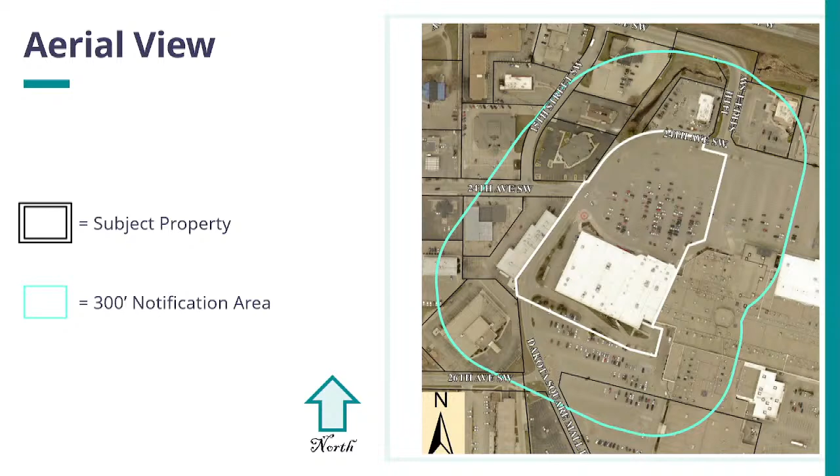Thank you, Chairman Dominguez, members of the commission. Target is part of the overall Dakota Square Mall site. The white lines on this map indicate the property boundaries, and the light blue lines denote the property owner notification area.

This case is very similar to Scheels, which was processed earlier this year. A major modification related to on-site circulation and overall building expansion is prompting the need to bring the property into compliance with the newly adopted land development ordinance. The equivalent zone for C4 planned commercial, which this site is presently zoned, is C2 general commercial with a PUD overlay.

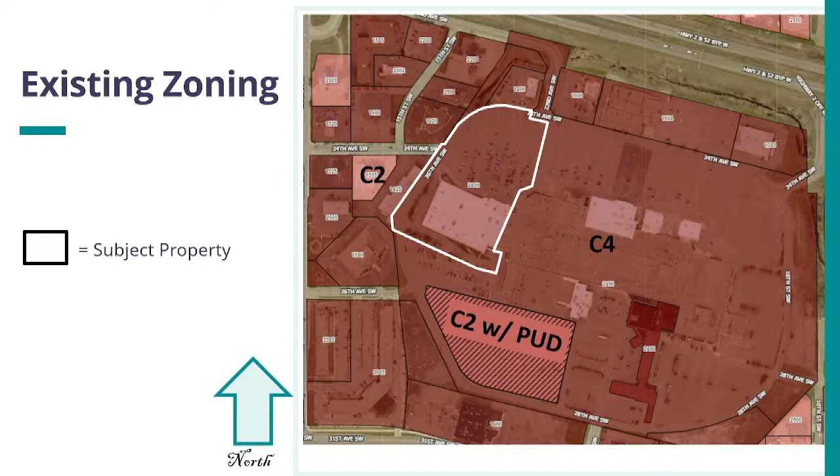The future land use map denotes the subject property as commercial. So we'll go over some of the modifications. The modifications to the site include a 24,434 square foot building expansion along the front entry and west facade. This expansion is realigning the broader circulation patterns for the property, so I'll bounce back and forth between some of these slides so you can see some of the deviations between the on-site circulation and parking.

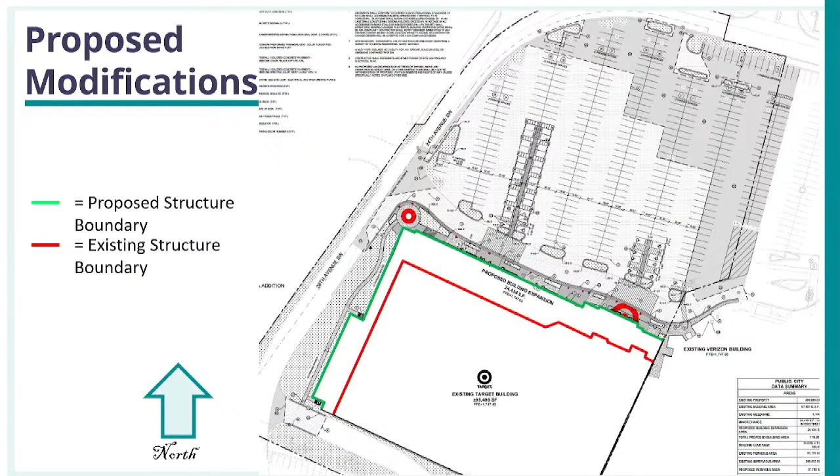So these are the proposed modifications. Again, I'll go back and forth. If you notice, the parking to the west is being removed to accommodate the expansion and expand some landscaping. Again, the on-site circulation is going to be straightened out a bit. The overall design, at least from an aerial perspective, is going to look very similar.

Landscaping improvements along the north facade of the building will include planter boxes and foundation plantings, parking lot end caps, and expansion of the landscape area along the west, as previously noted. This will increase the pervious coverage of the site from approximately 8.19% that exists today to 9.92%. Through this project, this equates to approximately 6,600 square feet of additional pervious coverage that's going to be added through this expansion.

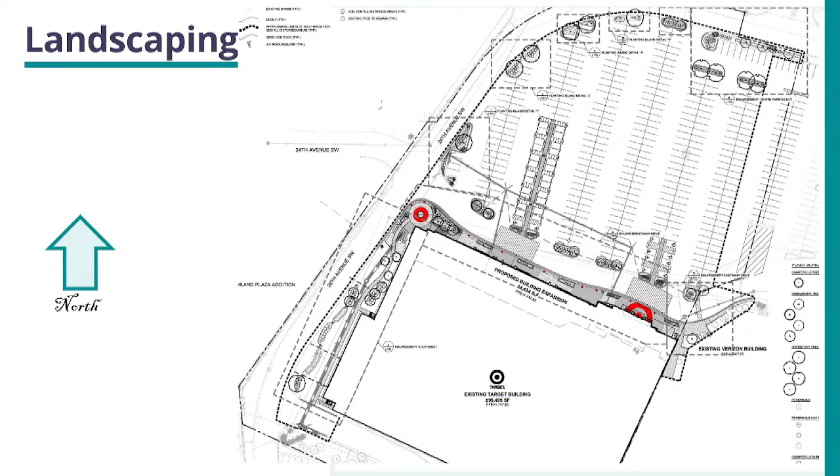Another major change operationally for Target is to expand their online order and pickup accommodations on site. So the parking is proposed to be reduced overall to accommodate the expansion, but overall, Target's analysis of the site is ultimately that while they're losing parking stalls, the incorporation of these drive-up online order and pickup stalls will offset any of those losses.

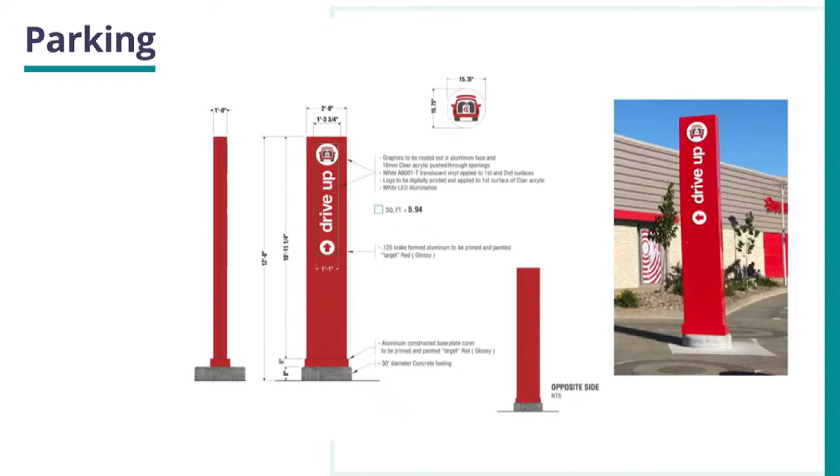Target did submit a late exhibit with minor adjustments, so compared to what's provided in the staff report, I'm going to highlight each of the changes. I'm going to hand these out to you so you have them. Just give me a minute to pass these out. Thank you.

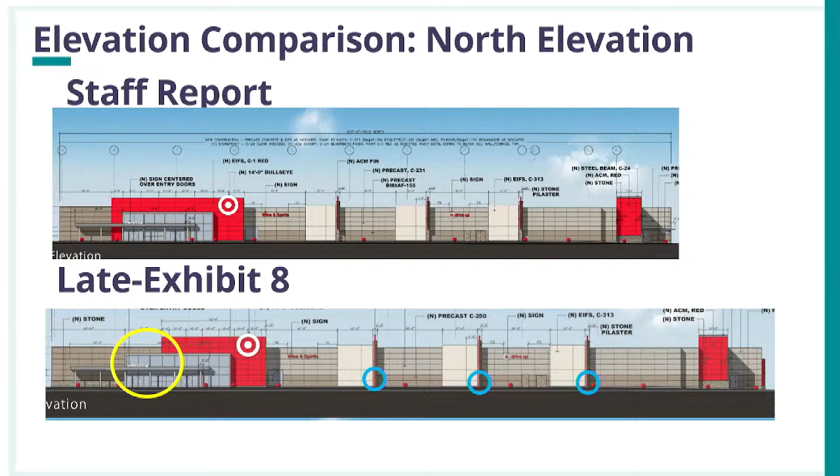So when I say minor changes, I do mean minor. As you can see, what was included in the staff report on top versus what's provided in the late exhibit - there's just some different entryway alterations. We've highlighted those in the yellow circles and the blue circles to bring attention to the changes. They're very minor, but as I go through these, I want to make sure you have the most up-to-date information, so that any motion for approval would include this version of what's proposed by Target.

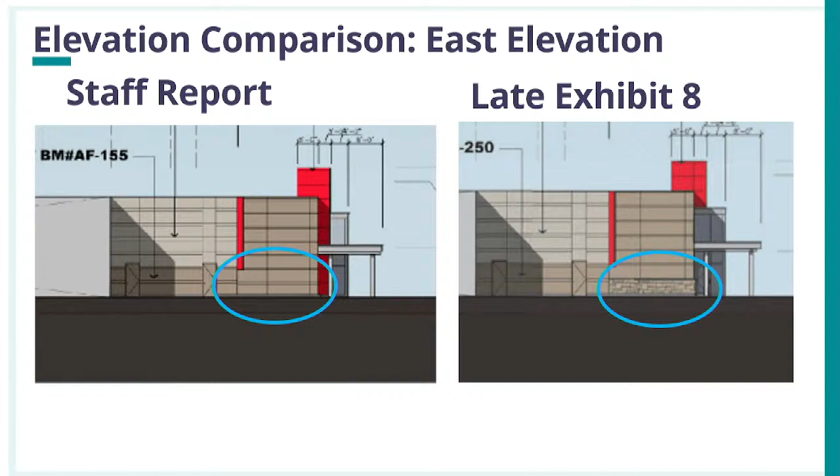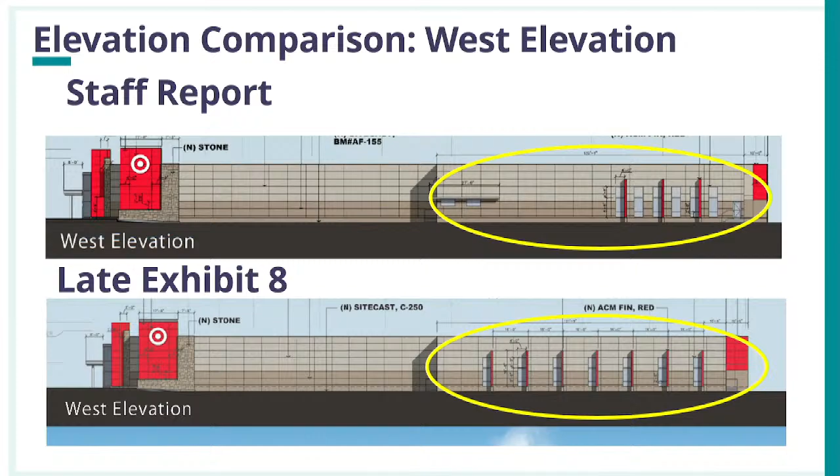So here are the findings of fact. In short, the applicant has submitted a complete application. The proposal meets the requirements of the PUD overlay. The Minot Planning Commission has the authority to hear the case and provide recommendations to the council. As I previously mentioned, we're recommending approval of the application.

The recommendation on screen includes reference to late Exhibit 8. Staff asks that any recommendation aligning with ours should use the one on screen versus the one included in staff's written report. With that, staff will stand for questions.

Thank you, Mr. Van Dyke. Is there any questions for staff? Seeing and hearing none, then we will move to the public hearing.

If there is anybody here who wishes to speak on agenda item number 8, please come forward, give us your name, sign in, and the floor is yours. Hi, I'm Ryan Hilstead. I'm here on behalf of Target Corporation.

I work for Kimley Horn. I'm the project consultant, and I'm available for any questions. Is there any questions from the commission for the applicant? Seeing and hearing none, then, I think we'll let you know if we need you, Ryan.

Sounds good. Is there anybody else present that wishes to speak on agenda item number 8? Very good. Well, seeing none, we will close the public hearing then. Turn it over to the commission for a motion.

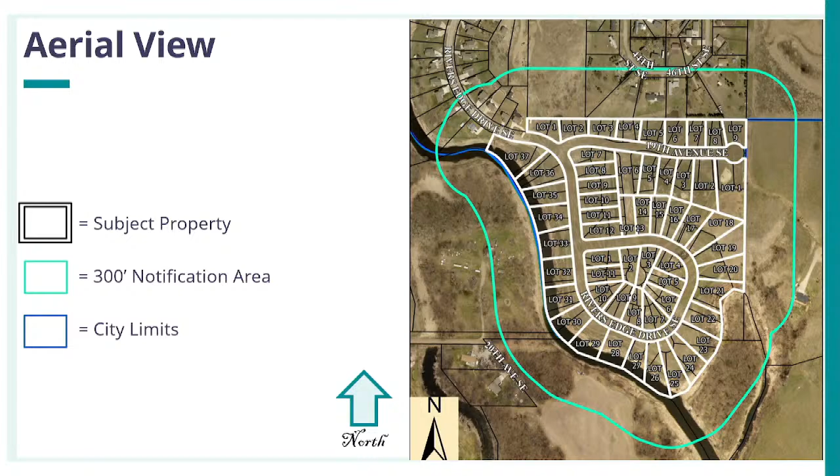Looking at the aerial view of the property, we can see the 300-foot notification area and city limits. Notably, lots 6 and 13 from block 2, the ones in the middle, and it goes through the middle around the outside where 45th Street Southeast was platted. As part of this, it will be going away because it's currently a platted road — it's just right of way right now.

And that goes right into the preliminary plat. Aside from the removal of 45th Street Southeast, there are proposed 57 lots that are part of the subdivision, versus the original one, which was 116. So overall, it's shrinking by about 59 units. Now, an important thing to note on this is an easement that is on the far end of 19th Avenue Southeast.

So there's an easement there shown as some dotted lines on the map, which will indicate when the development to the east develops. That cul-de-sac will be turning into just a through road, ideally, allowing it to expand out that way. So it won't be a dead end in the future. It's allowing that to actually be designed for.

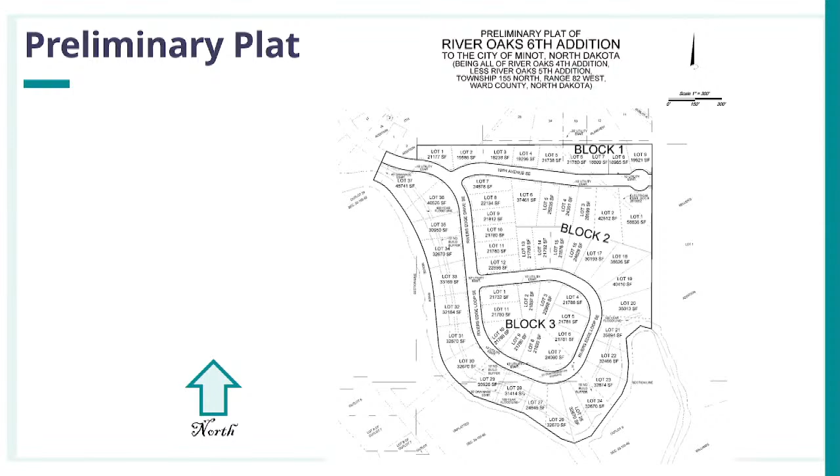Overall, the subdivision does meet all of the required standards for a subdivision, except for section 10.3-3C related to dead-end roads and how long they can be, related to the beginning of a cul-de-sac.

Going into the existing zoning of the property, the vast majority is zoned R1 single-family residential. It's going to be staying as that, with the exception of the area in the middle, which is R2 two-family residential, and that's actually shrinking quite a bit in size for actual properties, going from 38 to 11 lots. But beyond that, the zoning for the properties really won't be changing.

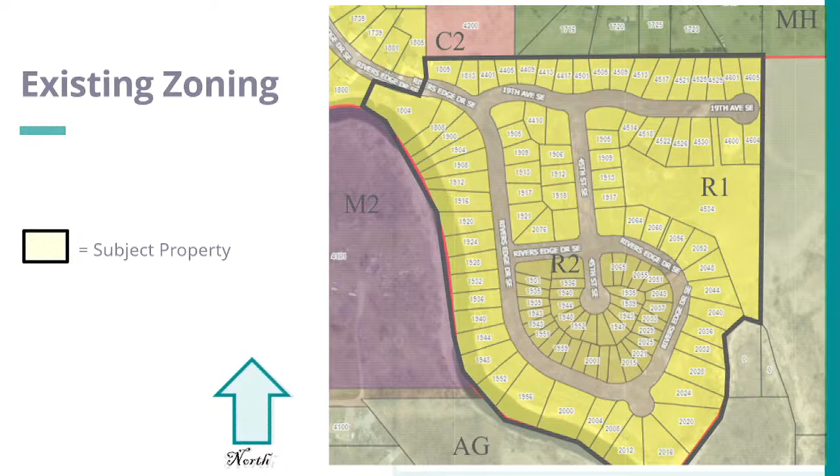Now, moving to the variance itself, staff finds there are grounds to support a variance based on the topography of the site, because there are significant topographic changes within 500 feet of the cul-de-sac, which I'll show on screen, that would greatly limit the feasibility of providing additional connection to bring the development into strict compliance.

Now, looking at the topography, I took two of the exhibits, Exhibit 1, the aerial photo, and Exhibit 7, the topography, and overlaid them. So you see how significant the topography is, especially within 500 feet, which I denoted on the slide. Within that, where the road itself is, it's fairly gradual, but going within that 500 feet, it gets fairly steep, and across the distance to River's Edge Drive, it could be 40 to 50 feet in drop from the road up there to where it actually comes out.

So looking at that, I will go and wind it back to the previous slide looking at the topography. We kind of touched on this already, the overall density of the development is going to be decreasing dramatically from where it was.

Where it was 116 different lots, it's now going to be 57. As far as the existing distances, the 500 line is the green line, going out to where the current platted 45th Street Southeast is. That's about 615 feet, and they're proposing going to roughly 1,000 feet from the cul-de-sac, shown on the screen to just above where it says 1560 for the elevation.

So as it stands right now, the development actually would be more of a concern if they were to build exactly as they're allowed to today. They'd have higher density, and it wouldn't have a provision at all to actually have a through street there, because that cul-de-sac would just be ending, and that's as far as that would go.

So just through the very nature of how this is actually being platted, it is addressing a lot of the concerns that Mr. Ritter had. I believe it's Ritter.

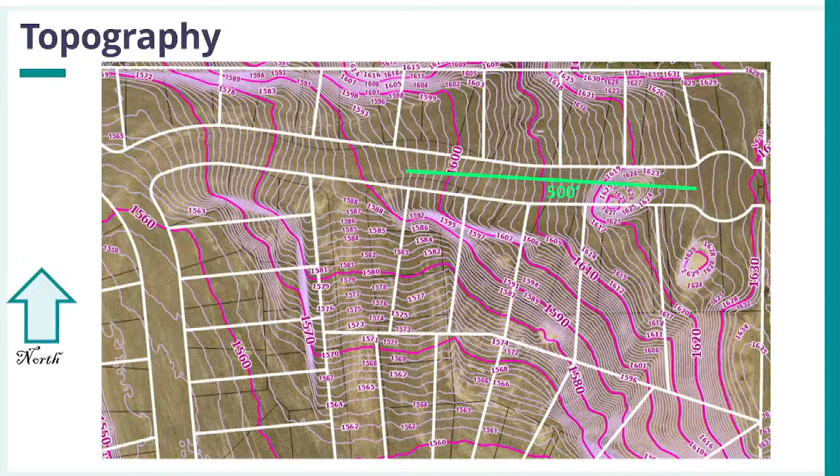Thank you, I appreciate that clarification. Thank you. Any further discussion?

Mr. Chair, I too share those concerns as far as the density of traffic. I've driven out there, those roads are not good and they're narrow. And to add an additional 57 properties, I wonder if there is a way to go ahead and approve it from R1, R2 to R1, but maybe hold off on approval for the 500 to 1,000 feet. Is there a way to do that, to take another look, to have somebody go out and speak with someone?

Well, the motion as it currently stands on the floor is approval of the variance and the subdivision plat, which needs to be acted on. That is the current motion on the floor. Anything further will be dictated after the fact.

Chairman Demakis, if I may, if the variance were to be denied, the existing subdivision plat they proposed wouldn't be in alignment with the subdivision code as it is. So that would probably change staff's recommendation to a denial, as it wouldn't meet code, because then they'd have about 1,000 feet of dead end where they can only have 500. So to approve the rezoning would be to, at the same time, look at approving the subdivision, because that's really rezoning just that block, which doesn't exist without the subdivision. The variance would have to go along in hand with the rezoning and the subdivision all at the same time. I see, thank you.

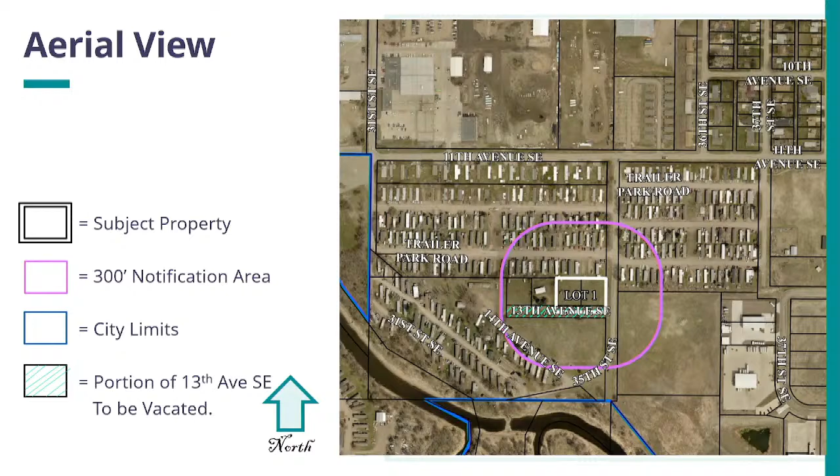Going into the subdivision and the aerial plat, this is southeast of the Public Works building, which you can see on the map in the upper left-hand corner. On the map, I noted the portion of 13th Avenue to be vacated. As part of the subdivision, they will be including half of that vacated 13th Avenue within the proposed Jefferson South Addition.

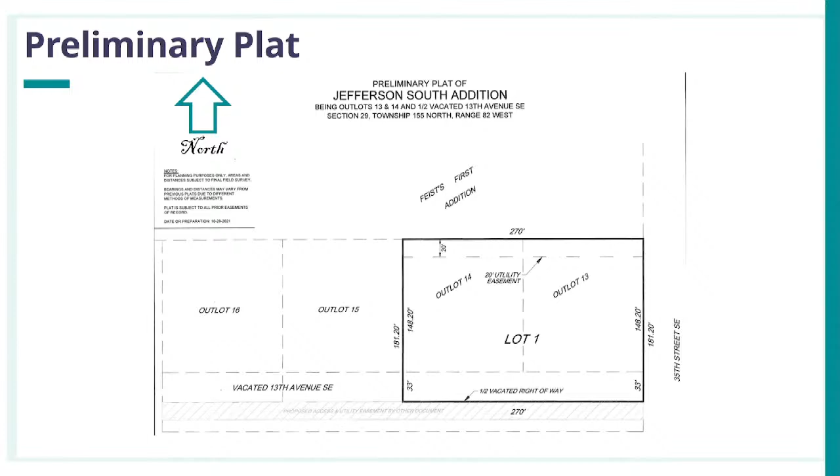Looking at the existing zoning, the property is currently zoned MH, the manufactured home district designation. The property to the south, even though it is a manufactured home park, is currently zoned C2 General Commercial District.

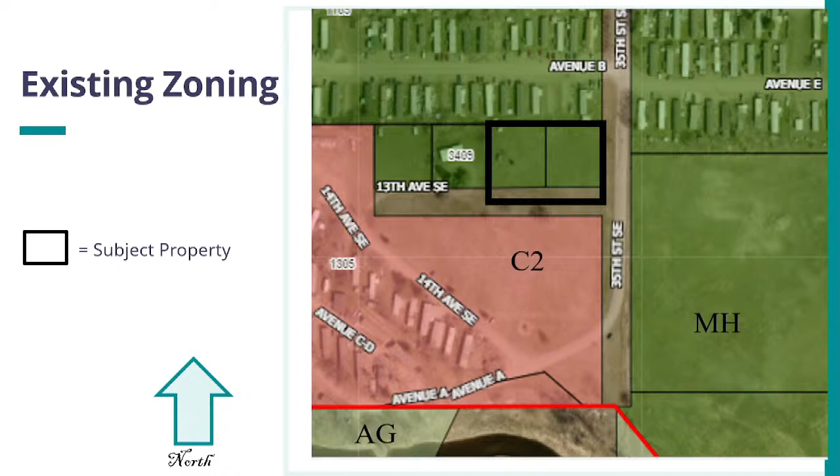Now looking at the future land use map designation, the vast majority of the property involved with this subdivision is currently designated as manufactured home park, with the exception of the right-of-way, which doesn't currently have a designation. That would be covered with the comprehensive plan update that's in the beginning steps right now.

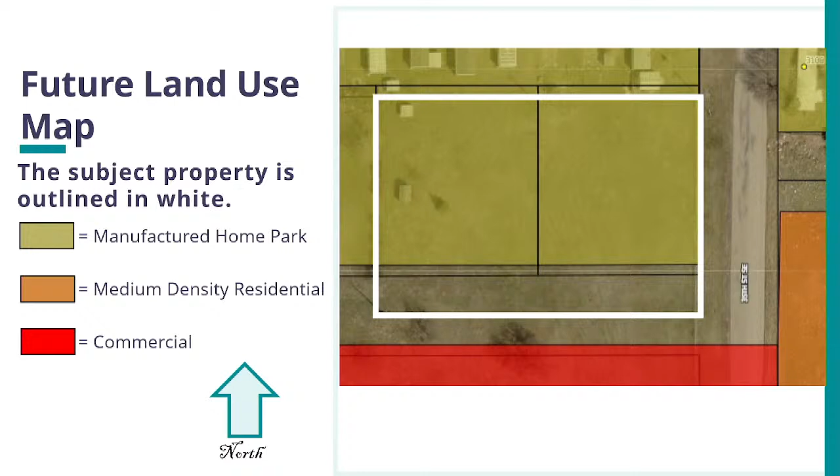Now, looking at the applicable variance criteria, staff found that 4 of the 6 criteria were applicable for the variance request. The first was Section 9.1-3G1, which was related to the shape and size of the property.

We found that this request does arise from conditions of exceptional shallowness or shape of the specific piece of property, due to the size of the property. While it does meet the requirements, there are issues with overall dimensions and other standards that must be met as part of a manufactured home district that prevent strict compliance with the land development ordinance as a result.

Another one was Section 9.1-3G3 related to exceptional practical difficulties, with the small size of the lot causing these difficulties. If we were to apply all the requirements from the MH district, it would actually end up being in violation of several other regulations in order to meet the two they requested variances from.

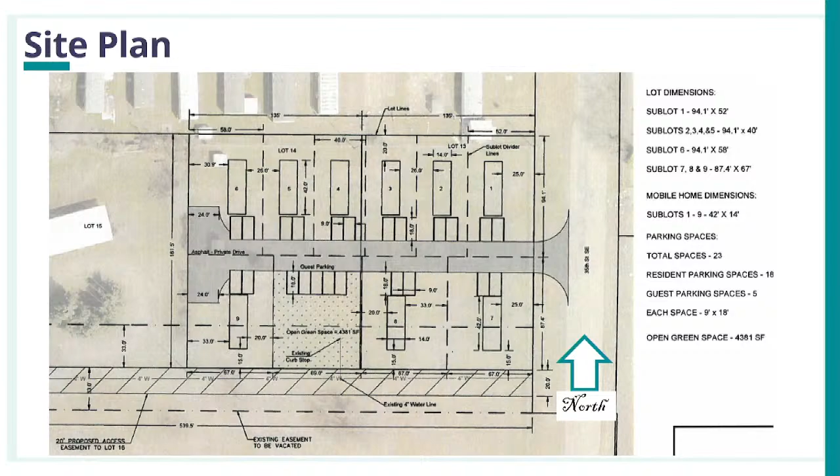So then we also found, in addition to the first two sections, that it also aligned with section 9.1-3G5, which is related to the character and the property rights of the nearby neighborhood. Overall, the neighborhood is all mobile home around it, everything's either zoned for it or it's an existing mobile home park. None of these parks actually have any of the landscape buffers we require now, since they're older. So with the landscape buffers being required even in the reduced fashion as the applicant requested, it would still ultimately be a major increase to the character of the neighborhood. It would be more beautifying than it is right now, where it's a grassy field with a fence around it.

Section 9.1-3G6 relates to the comprehensive plan. Staff actually found that the comprehensive plan supports the requested variance through Housing Goal 2, Policy 2, which is to promote creative use of site planning, building design, and flexible development of infill lots to increase density and provide greater housing opportunities. So what the applicant ended up doing was their own creative subdivision design, providing a much higher density than what outlots 13 and 14 would have been able to support by themselves if there were two individual mobile home lots.